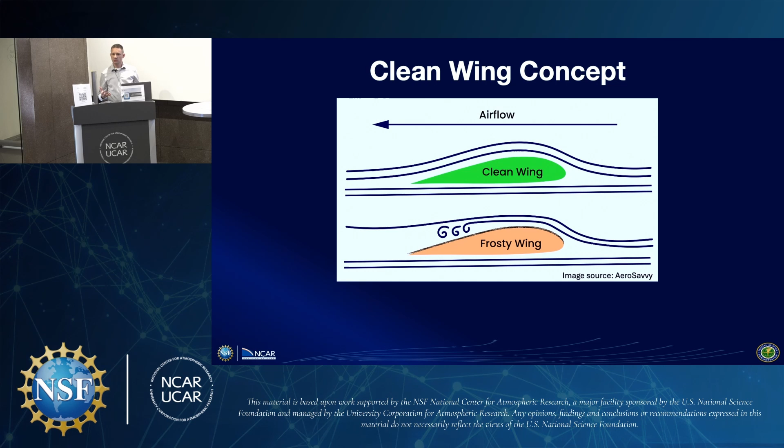So how much contamination on the wing is potentially too much that would cause a problem? Literally as little as 1/4 of an inch of buildup on the wing is enough to affect lift on your aircraft. That'll increase drag, increase weight, decrease your lift, and if you're trying to take off from the ground, it can definitely cause you problems.

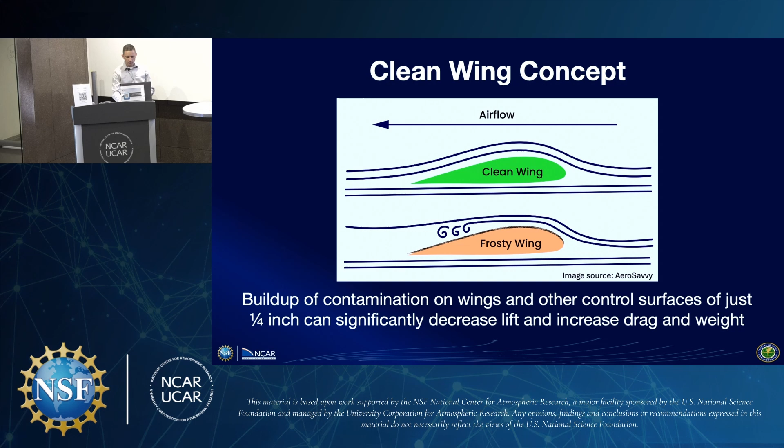So let's talk about some of the incidents that have occurred in the past that highlighted the dangers associated with snow buildup on the aircraft on the ground. The first one I want to talk about is Air Ontario Flight 1363.

This accident happened back in 1989. This was an aircraft that was flying from Thunder Bay to Winnipeg, and it stopped in Dryden to do a quick fuel up. The problem was when they landed, the auxiliary power unit on the aircraft stopped working. And that meant if they turned the engines off, they would not be able to get the engines restarted. That airport is also a very small airport, so they didn't have power that they could hook up to the aircraft to allow the aircraft to start the engines again.

So while they're stopped there, they're fueling up. It was lightly snowing at the time. The pilot said, well, I can't turn the engines off, and regulations state that you cannot de-ice an aircraft while the engines are running. So we simply won't de-ice the aircraft.

So before takeoff, it was noted that roughly 1/4 to 1/2 an inch of snow had built up on the wing surface. And as they were getting ready to take off, they became airborne briefly, but because of that added friction on the surface of the tops of the wings, they couldn't gain altitude because they didn't have enough lift. They ended up clipping the tops of the trees at the end of the runway, and the aircraft crashed, killing 24 of the 69 people on board.

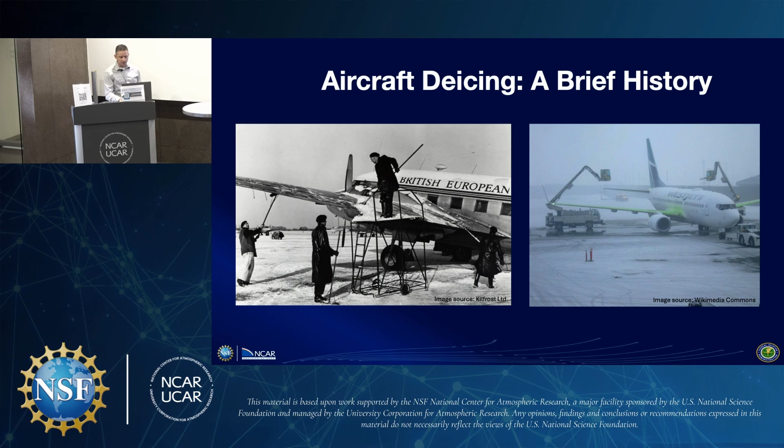So I'm going to give you a little more detail on the de-icing fluids themselves. When an aircraft goes out for de-icing, the fluids used are referred to as type 1 fluids. These are non-thickened fluids, and that's important for the next fluids we talk about. These fluids are typically a water and propylene glycol mixture. For anybody familiar, propylene glycol is the same chemical used in antifreeze in your cars, so it's literally the same components we're using to de-ice the aircraft.

The de-icing fluids are applied hot at high pressure. The idea is not only do we want to melt any of the precipitation and contamination on the aircraft, we want to blast it off the aircraft as well. We want to make sure there is nothing left sticking to the surface of the aircraft.

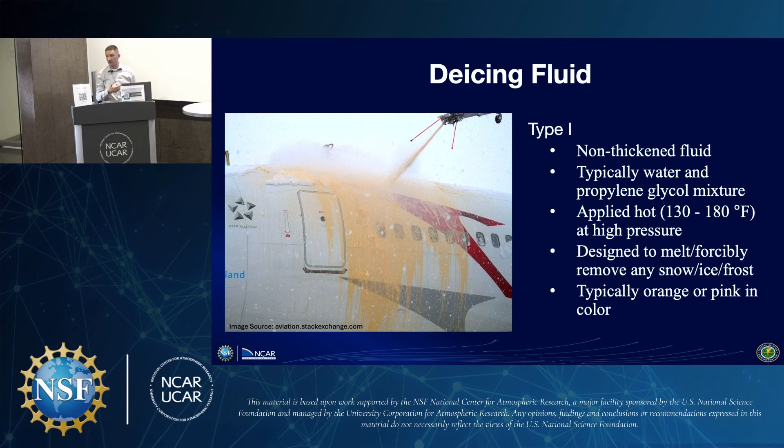These types of fluids are typically orange or pink in color when applied. So anybody who's been through the de-icing process, sitting in a window seat, the first thing you'll probably notice is this orange fluid dripping down over your windows as you go through the de-icing process.

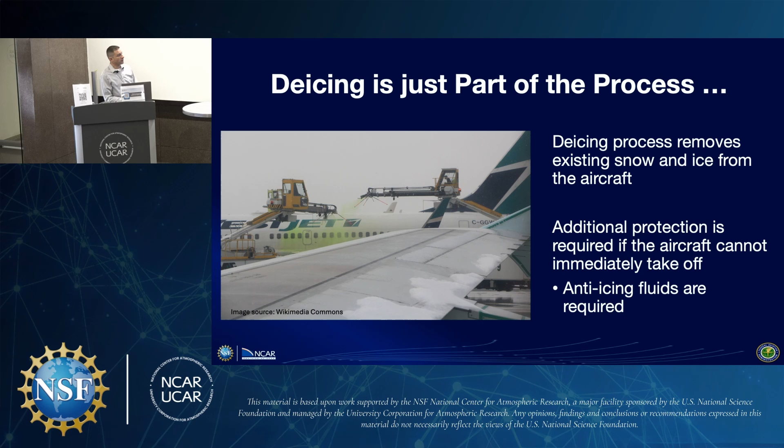However, de-icing is just one part of the process. De-icing will remove the contamination, but if you're in a situation where snow and ice are still building up on the aircraft and it isn't ready to take off, you need to do something to prevent snow and ice from building up. In that case, we have anti-icing fluids that are applied to the aircraft.

Anti-icing fluids are referred to as type 2, 3, and 4 fluids. These are thickened fluids, and I'm going to talk a little more about that coming up. They're applied at ambient air temperature, so we do not heat these. We want them to reside at ambient temperature, basically so the fluid will stick to the aircraft a bit more.

The purpose of this is really to absorb any of the falling precipitation - rain, freezing rain, snow, freezing drizzle. Anything coming out of the sky is going to land in this fluid, and this fluid is going to absorb that precipitation. These fluids are typically yellow or green in color, and are either propylene glycol or ethylene glycol-based fluids.

Type 2 fluids were the initial anti-icing fluids they came up with, after they realized that yes, we can do de-icing, but if an aircraft is going to take off in continued snowfall conditions, we need to provide protection. Type 2 was what they came out with, and that color is mostly straw in color.

The type 3 fluids are designed specifically for commuter type aircraft. These are aircraft that are going to take off at lower speeds, and I'll talk a little bit coming up about why that's important.

The Type 4s were introduced in the early to mid 90s. They're emerald green in coloring. All of these Type 2, Type 3, and Type 4 fluids can provide protection up to 2 hours, depending on the conditions the aircraft is experiencing. The nice thing about Type 4 fluids is if you run out of Type 1 fluid, you can simply dilute a Type 4 and heat it up to use as a de-icing fluid also.

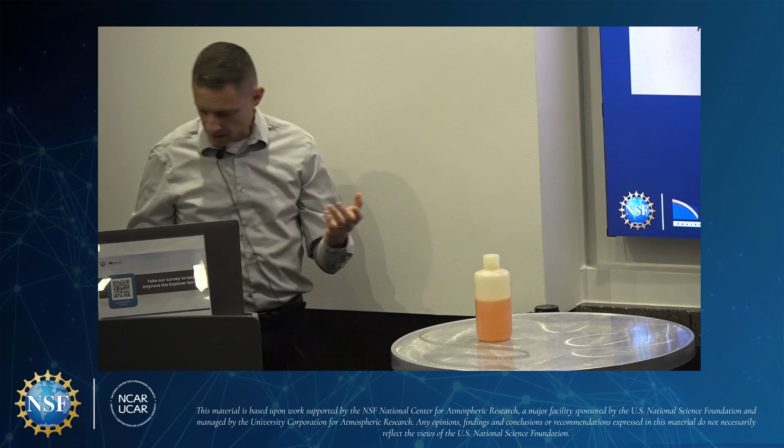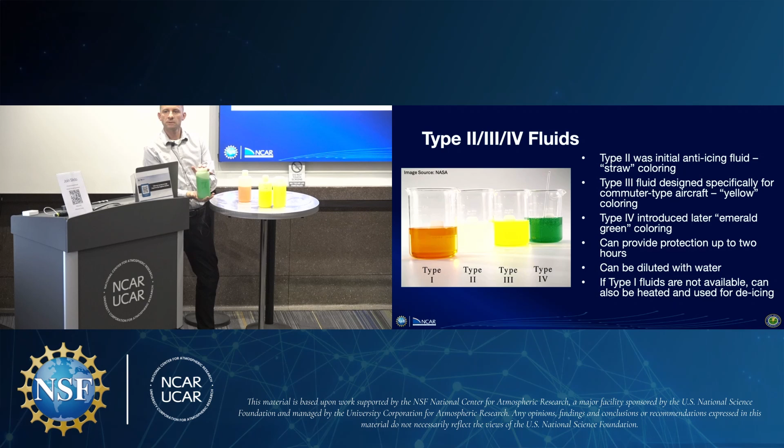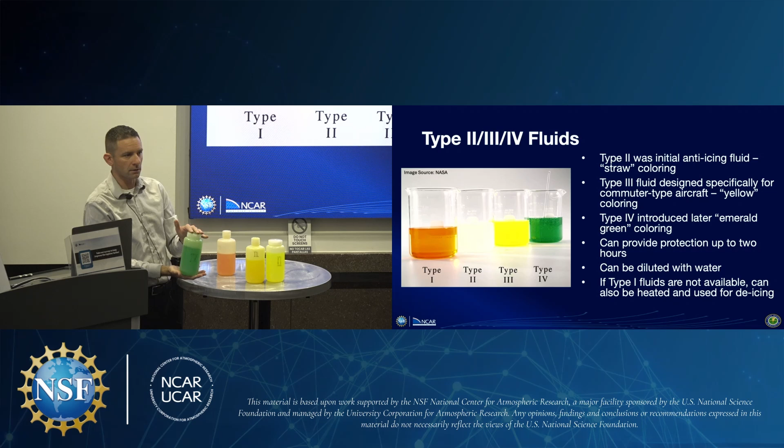Our other types of fluids - we have a Type 2 fluid, which is straw-like in color, a little bit yellow. Here's our Type 3 fluid, which is more for commuter type aircraft. And then we have our Type 4 fluids as well. The difference you notice with the Type 4 fluid is it's much more thick. These fluids are really designed to adhere to the aircraft surface and provide protection so that as it's precipitating, it's not running off really quickly - it's sitting there, absorbing that precipitation. Incidentally, we also call this our Slimer fluid because of the green coloring.

Why might the fluids be different colors? This is for all of you in person as well as those of you online. I'll turn it over to our AV people and let them bring up the Slido questions so you can answer that.

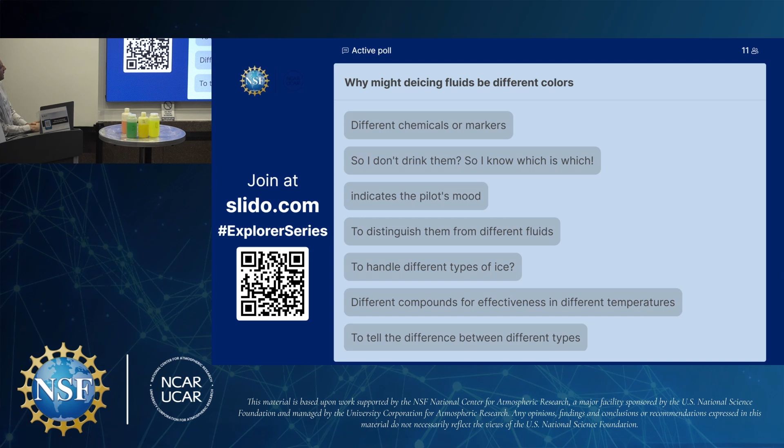Here's our answers: different chemicals or markers. So I don't drink them, so I know which is which - fair, I will say you do not want to drink these fluids. Indicates the pilot's mood - also fair. To distinguish them from different fluids, yes, and we're going to come back and touch on that. To handle different types of ice - also a good one. Different compounds for effectiveness in different temperatures, or to tell the difference between different types. Congratulations, you have all hit on the correct answers.

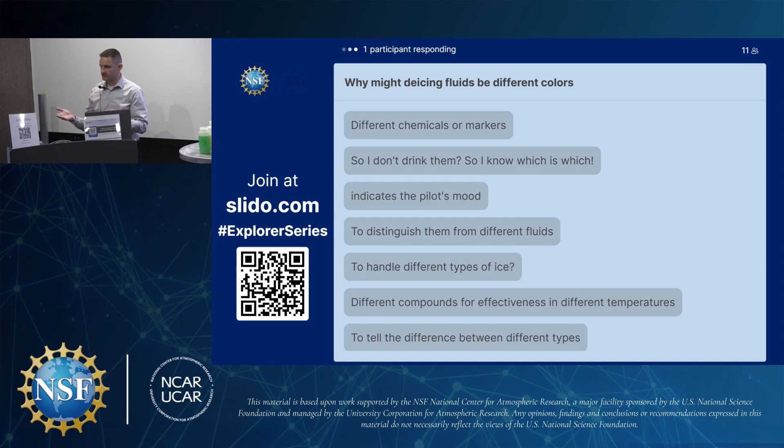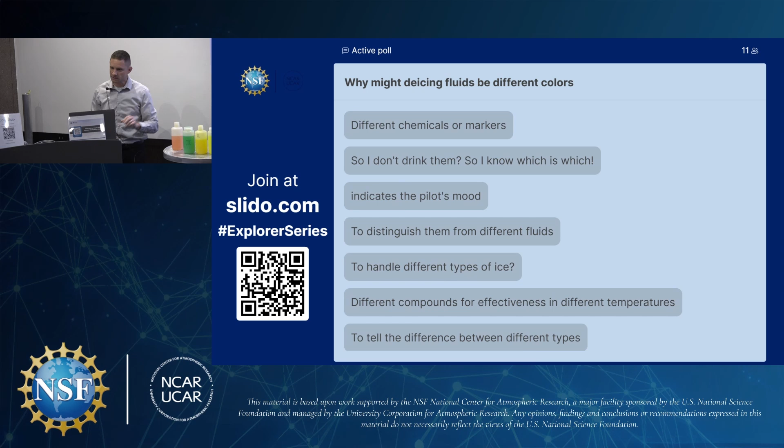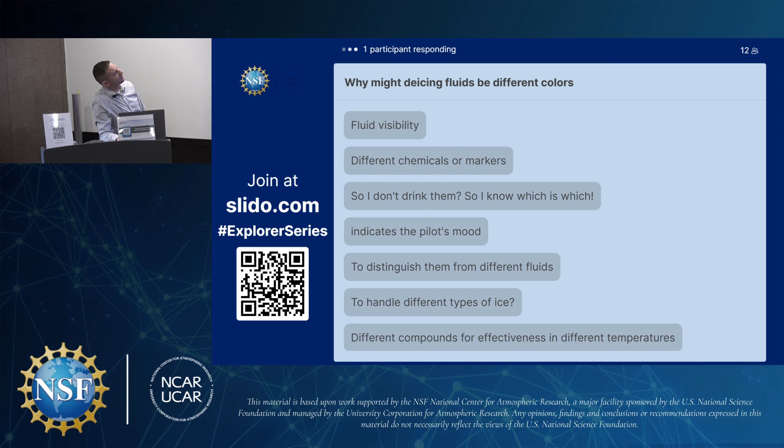The coloring is really twofold. One, it's so the de-icing people, when applying these fluids, can tell which sections of the aircraft they have done versus the sections they haven't. The initial fluids were not colored, so when you applied it, especially if it's precipitating, it's really hard to tell where the fluids were on the aircraft. So then we colored them different colors so you can tell Type 1, the very distinct pink-orange color, versus the Type 2, 3, or 4 fluids when applied to the aircraft. Well done, congratulations - you're all on my same wavelength. Fluid visibility, perfect. All right, let's switch back over.

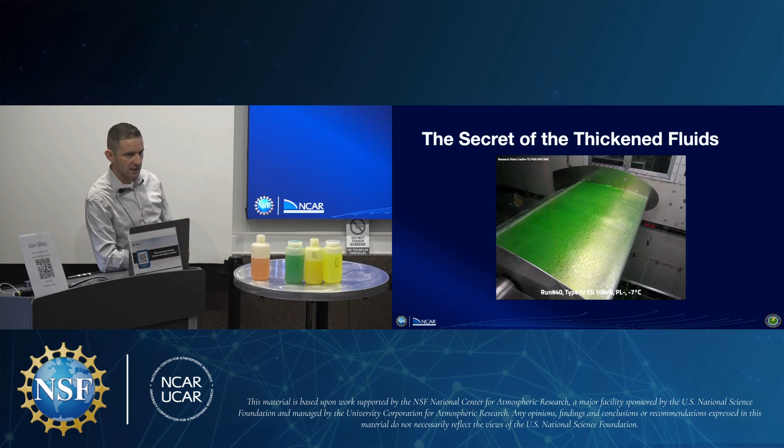Now I want to talk a little bit more about these thickened fluids. I said at the beginning of the lecture that there's this clean wing concept - when you go to take off, you don't want anything on the wing. However, this Type 4 fluid, when you apply it, sticks to the wing. That's bad, right? The Type 4 fluids actually had a little bit of engineering that went into them. These fluids have a special polymer that chemists designed that makes the fluid thick. So the idea is you put these polymers in the fluid, put it on the aircraft wing, and it's thick, viscous, and sticky. But we refer to these fluids as a pseudoplastic fluid, meaning that when a shearing force is applied, those polymers break down, and this Type 4 fluid will actually turn to the same consistency as a Type 1 fluid.

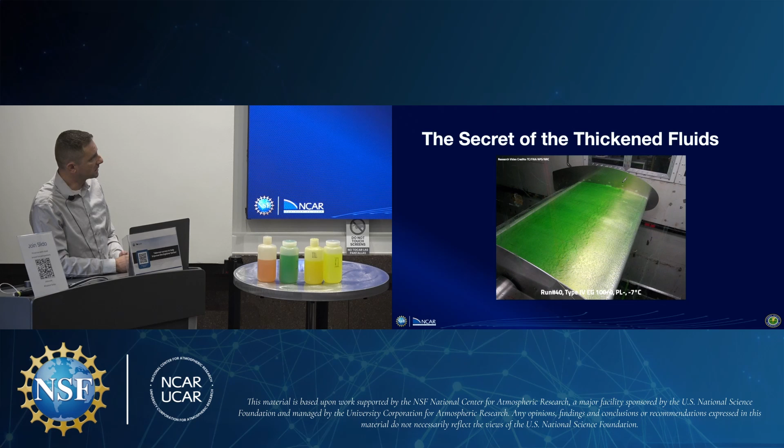I have up here a demonstration. One of the testing mechanisms we use is taking an artificial wing surface, which is what you see in the picture here, and this is actually a video. I'll start this video running in a second. This is in a wind tunnel. We have Type 4 fluid - you notice the emerald green coloring - and there has been precipitation applied to this. They've applied ice pellets in the wind tunnel to this fluid. I'm going to start this video running here.

There we go, you notice the flashing. That's a series of cameras set up to take pictures at certain times. What's going to happen is they're going to turn the wind tunnel on.

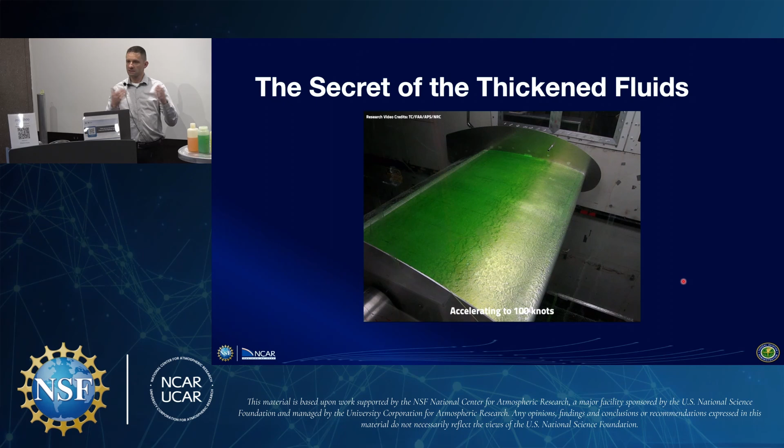We have a fluid that has absorbed a bunch of precipitation. It's clearly stuck to the surface, but now we're going to simulate an aircraft accelerating up to 100 knots. As the wind gets stronger, the fluid becomes thinner and thinner and actually runs off of the wing. So imagine at this point the aircraft is going down the runway, it's reached the speed at which it's getting ready to take off. The fluid has now completely run off the wing along with all of the contamination. Now the wing tilts up to simulate the aircraft actually taking off from the ground.

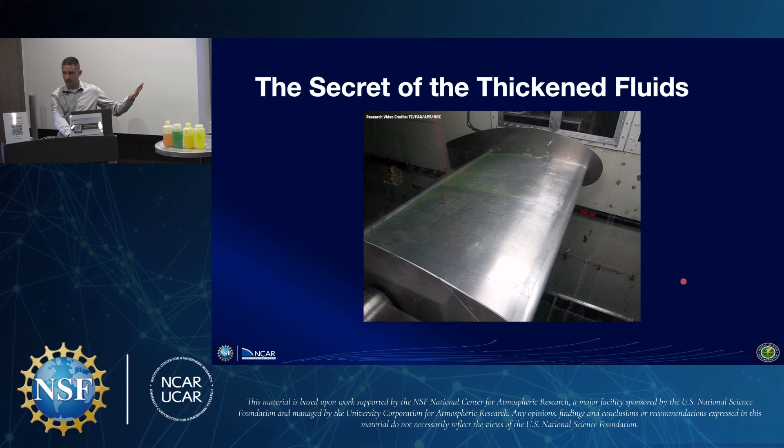So now we have a fluid that provides protection to the aircraft. It's going to stick to the aircraft when you need it to stick, and it's going to run off the aircraft when you don't want it sticking anymore. A lot of engineering has gone into these particular fluids.

As far as the anti-icing process itself, how long those fluids last is really determined by the type of precipitation that's falling. Is it snow? Is it ice pellets? Is it a combination of mixed precipitation? The rate the precipitation is falling, and the airport layout also has an impact on this.

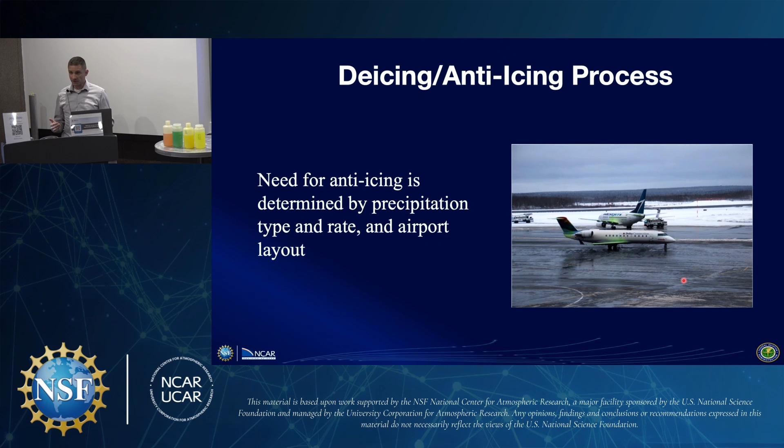There are two different ways aircraft can be de-iced at an airport. There's gate de-icing - this used to occur at Chicago O'Hare all the time. The aircraft would pull up to the gate, people would get off, new people would get on, they'd load all the luggage, and then before they pushed back from the gate, the de-icing trucks would come up and de-ice the aircraft. The problem with gate de-icing is as soon as you apply the fluids, you have a certain amount of time you have to get airborne before you have to apply those fluids again.

When you do it at the gate, you've got to wait for somebody to push the aircraft back, then start taxiing, then get in line. So you're cutting into the time that these fluids are going to last. Also, you're creating hazardous conditions on the ground because de-icing fluid is extremely slippery. There are a lot of slip and fall accidents that occur with the ground crews loading and unloading baggage on the planes as well.

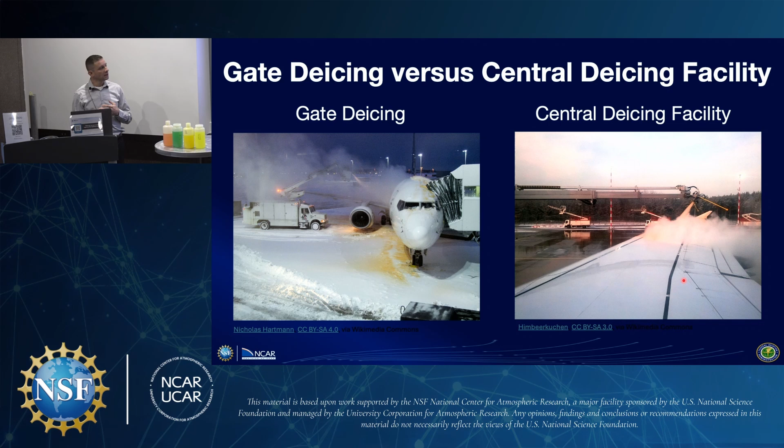Central de-icing facilities, on the other hand, are a big area at the airport, and DIA actually was one of the airports that kind of spearheaded this when they built it back in the 90s. It's a big pad located right next to the runway. The idea is the aircraft will go out to this pad, all the de-icing trucks are there, you pull up, the trucks come up and very quickly de-ice you. If they need to, they will anti-ice you. You're given clearance at that point that you're good to go.

Usually you're first or second in line, so you pretty much go, get on the runway, and take off - you're out of there in 10 to 15 minutes after the de-icing process. So the central de-icing facilities are really the way airports are trying to move to cut down on a lot of the time needed for aircraft taxiing while you've got these fluids on the wings.

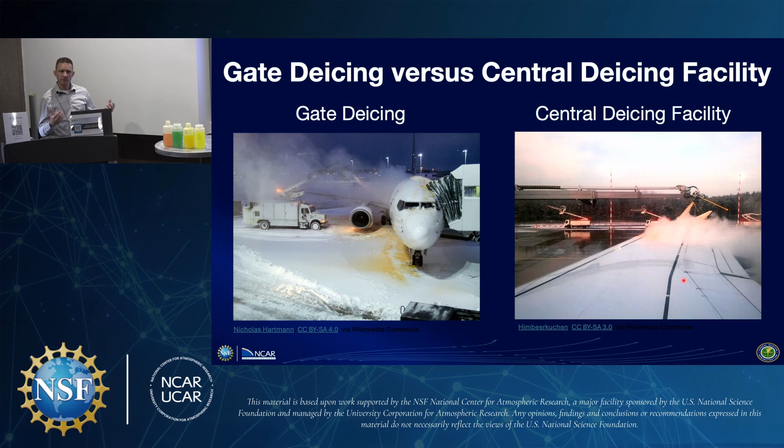I get a lot of questions once I've talked about these different fluids. The most common one is, how long does the fluid last? Meaning, how long does it provide protection to the aircraft? There are a lot of factors that go into that.

The outdoor temperature, for example, with the type 4 fluids - I talked about how we have these polymers in this fluid. These fluids are also known as non-Newtonian fluids because not only do they become less viscous with the shearing force, but also as the temperature gets colder, the fluid gets thinner instead of thicker. The reason is that the polymers used here, in colder temperatures, actually start shrinking down, and that naturally causes a thinning of the fluid itself. So the thinner the fluid, the more it's going to run off the wing, the shorter the amount of time it's going to provide protection to the aircraft.

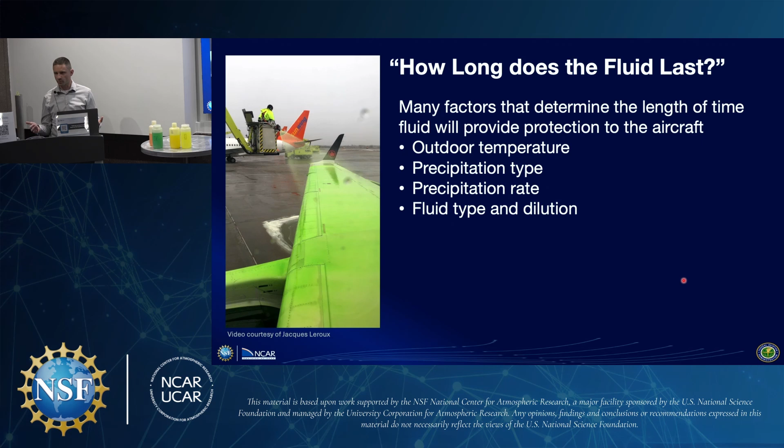Precipitation type and precipitation rate are factors, as well as the fluid type, meaning is it type 2, type 3, or type 4, but also the manufacturer of the fluid and the dilution of that fluid. A lot of these fluids can be applied at 100% concentration, or you can thin them down with water, which allows you to use less fluid, especially in light precipitation when you know the aircraft will get off the ground quickly. It's a bit of a cost-saving measure for the airlines.

Another question I get is, how do pilots know when the fluid may no longer be providing protection? Pilots use holdover timetables. Holdover meaning the amount of time you have from when the fluid was first applied to the aircraft until that fluid is likely no longer providing protection from precipitation to your aircraft.

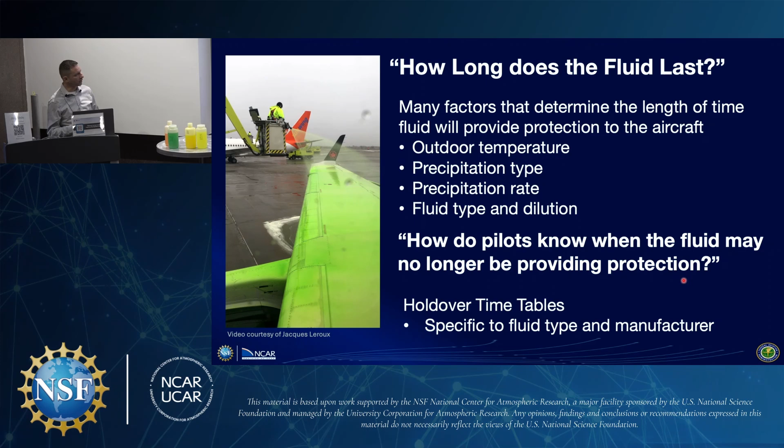These holdover times are specific to the fluid type and the manufacturer, meaning every time a manufacturer comes out with a new fluid, they have to go through an entire certification process with the FAA and Transport Canada before that fluid can be used on an aircraft. One of the things that comes out of that is these holdover tables.

The first thing they need to know is outside air temperature. They're given information in the cockpit as to what the current weather observations are at their airport. They'll look at this chart and say, okay, the first thing I need to know is ambient outdoor air temperature.

They need to know the fluid concentration, the fluid water by percent volume. That will be given to them by the ground crew telling them what type of fluid is being applied to the aircraft. And then they have to know what the precipitation type is.

This table will give them times for freezing fog or ice crystals, snow, freezing drizzle, light rain, and rain on a cold-soaked wing. Cold-soaked wing being an aircraft that has just landed—it was up flying at altitude where it's minus 60, then comes into an airport where maybe the temperature is slightly above freezing and it's raining, but the wing temperature is below freezing, meaning rain hitting the wing will freeze on the wing. So they have a category for that as well.

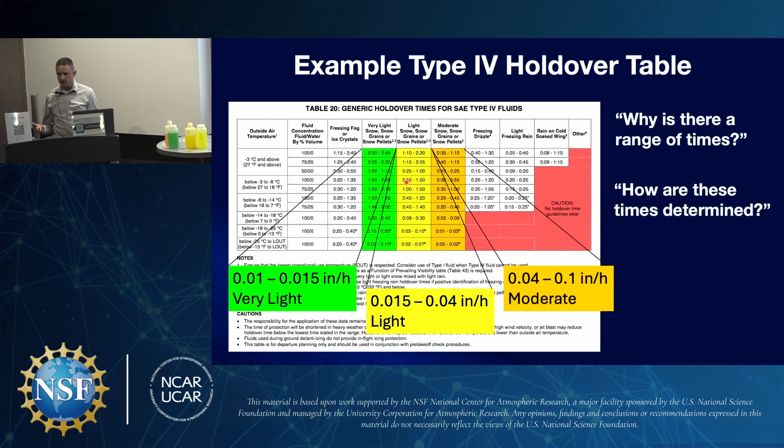It's a series of plates, and those plates are angled at 10 degrees. That 10 degree angle is done intentionally to simulate the angle of an aircraft wing, the top of the aircraft wing. So you apply the fluid to the top of the wing. We want to make sure that as the fluid is slowly moving down the wing due to gravity, we're simulating that same thing with these tests.

So we have a bunch of different plates set up, and we pour the fluids on the plates. We also have what are called rate pans, not shown here, similar in size to these plates. They also coat them with fluid, and leave them sit out there for 10 minutes while it snows on those pans. They weigh them before they take them out, then bring them inside and weigh them again. Subtract the difference, and they know how much snow, liquid equivalent, fell into that pan.

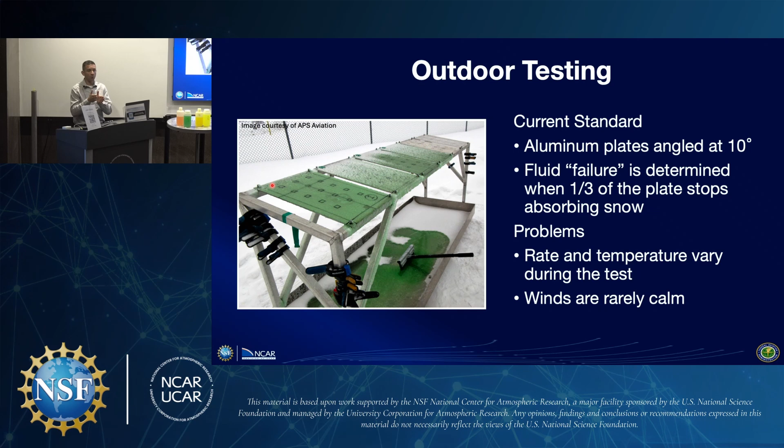Now, there are problems with doing this. Conditions outdoors are rarely ever constant. So you set these plates up, you let it precipitate, a snow band may move through. Maybe initially you've got really heavy snow, and then throughout the testing it may taper off to lighter snow. Also, the temperature throughout the testing may change as well, maybe warming up, maybe cooling down. So that becomes a problem of how do you start addressing those variables when we know they impact how long these fluids are going to last.

There's also the problem with winds. Winds are rarely calm, and winds can further impact some of the fluids. I'm going to talk about how that is in some of the data we've analyzed on the NCAR side, to show that wind actually does play sometimes a very significant role in how these fluids react.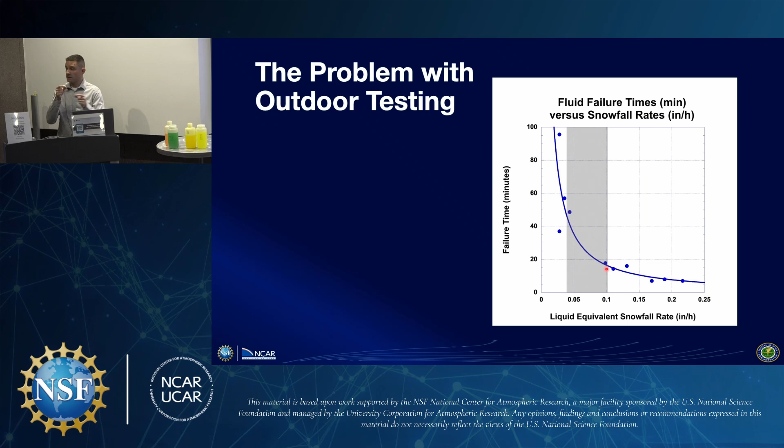Until you look really closely at this plot. Notice the two points that I have arrows pointing to. These points have roughly the same liquid water equivalent snowfall rate. However, their failure times are very different. The one on the bottom had a failure time of about 35 minutes, but the one on the top had a failure time of 90 minutes. There's almost an hour difference in these two particular tests, and yet the average liquid water equivalent snowfall rate was the same for the two of them.

This is where the FAA and Transport Canada and everybody is saying, why is this? Why do we see these conditions? A lot of it goes back to the outdoor testing, where you have variations in the snowfall rate throughout the test. Maybe the average rate was 0.03 inches per hour, but maybe it was really heavy at the beginning for one of the tests, and maybe it was really heavy toward the end for the other. Because of that, you end up with very different failure times of your fluids.

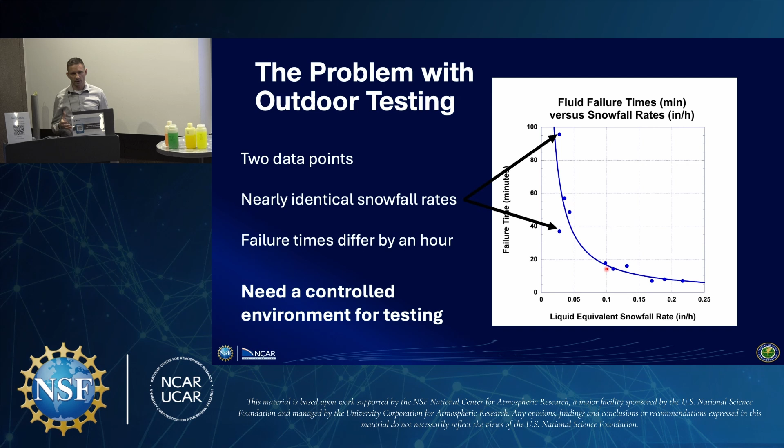So that means we need a controlled environment to do this testing in. This was recognized back in the 1990s, where the FAA, Transport Canada, and APS Aviation said outdoor testing is okay, but we really need a laboratory-controlled environment to do this testing. That means we need to find a way to bring the snow indoors. We have to develop a method where we can have it snow indoors and control these variables that we think impact fluid failure time. So we need to be able to control the temperature, and we need to be able to control the snowfall rate.

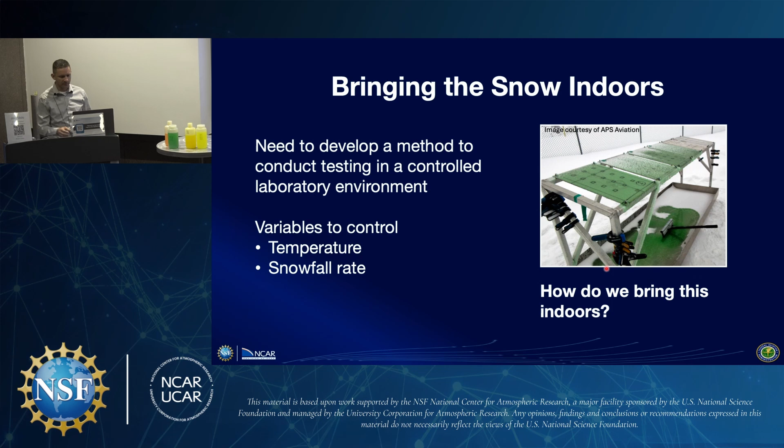So that brings the question, okay, how do we bring this indoors? Which brings me to my next Slido question for audience participation. How would you make it snow in a laboratory? I'm very impressed with all of your answers so far, so let's see if you can nail this one also.

Snow machine, build a snow machine. Clearly there are some of my colleagues calling in online who are cheating and answering this question. Pray and ask God to make it happen. Probably not gonna work so well, but we have not tried that. Shave off pieces from a block of ice and let them fall. Again, that would be one of my cheating colleagues online. Use the same stuff as they use at the ski resorts. What a novel idea.

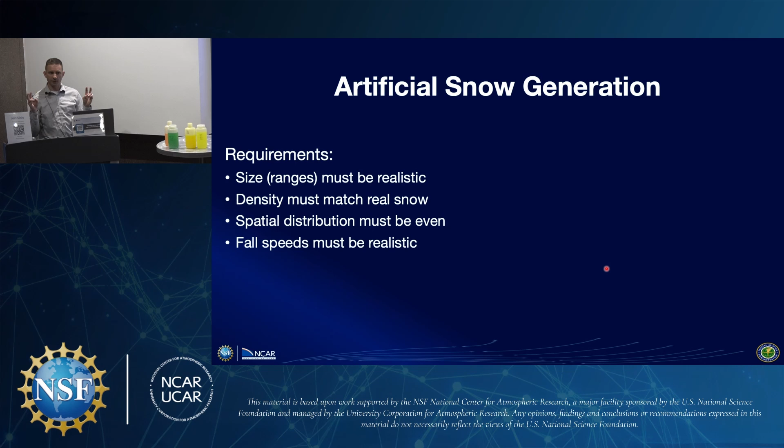So the first thought was, let's look at what the ski resorts do. Ski resorts take water and spray it into a very cold environment to create their snow. So we gathered some of that ski industry snow and looked at it under a microscope, and this is what it looks like. It does not look like snowflakes. In fact, they are very small frozen water droplets, many of which have actually frozen to each other—more like tiny ice particles. That obviously means the density isn't going to be right, and the snowfall rate isn't going to be right. So this was not really a viable option for us.

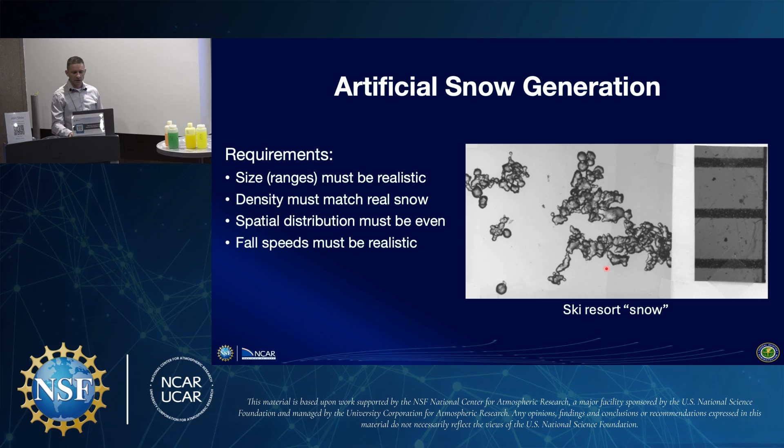But we said, if we can't use water in this manner, we could always think of shaving ice, like a giant shaved ice machine. So we ran with that idea and developed the NSF NCAR FAA shaved ice snow machine. The idea is that we create cylinders of ice loaded into a linear translation system that feeds them into a specially designed rotating carbide bit that shaves the ice off, creating snow-like particles.

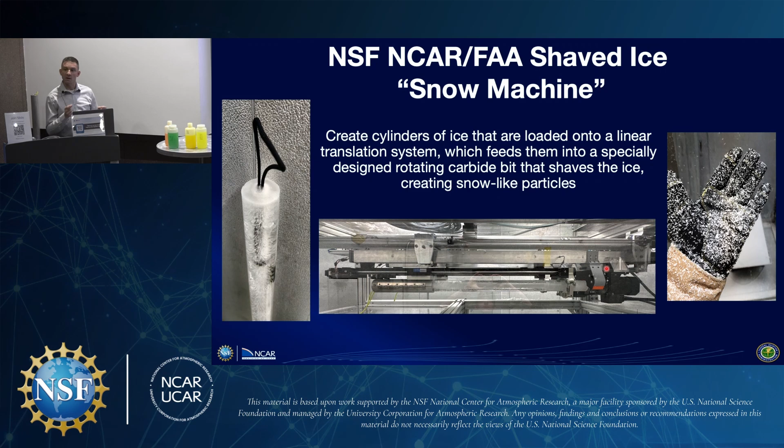Great in concept, actually works fairly well. I will say that this particular process has been something we have been working on for decades now, because while it may seem simple in concept, there are a lot of little nuances in being able to create this. And I'm going to talk about some of those.

So let's start with the ice creation process. How do we actually create the ice cylinders themselves? Initially we thought, perfect, we're going to get a metal cylinder, put some water in it, stick it in a cold room, let it freeze, and then bring it out into the open, into the warm room, and that cylinder is going to warm up, and we're going to be able to pull the ice cores out, and they're going to be perfect.

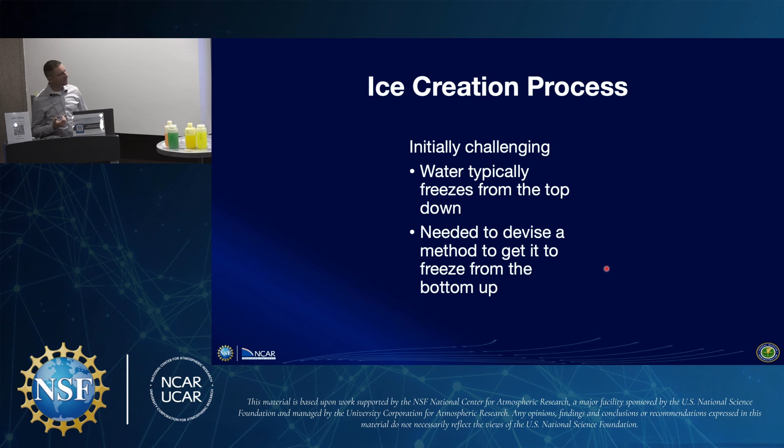The problem was, ice likes to freeze from the top down. So when we put it in there, ice would freeze at the top, which would then increase pressure at the bottom as it was freezing down, and we would break the bottoms off of our molds. So we needed to devise a method to get it to freeze from the bottom up.

Here's an example of our ice molds that we use. We take insulation and put really heavy insulation at the top, then taper it down to no insulation at the bottom. This essentially solved our problem. Now it will actually start freezing closer to the bottom first, and that water pressure gets pushed upwards, so that now you get freezing from the bottom up.

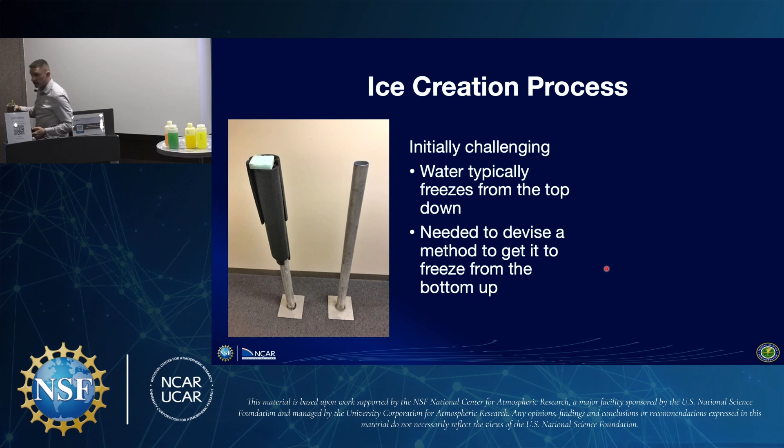To give you an idea of how big they are, this is an example of one of the ice cores that we feed into the machine itself. And this is one of our cores. So you can see nice formation of ice. Once you do that tapering, you do get lots of air and stuff that tends to get trapped in it, but for the most part, you actually have a really nice ice core that then you can take out and load into the machine itself.

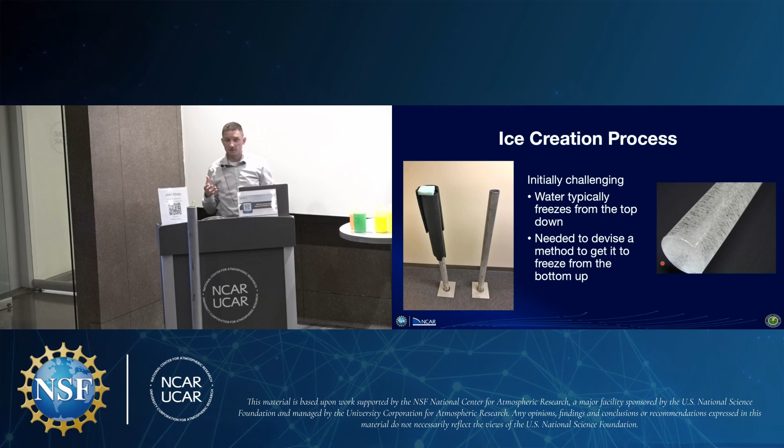Okay, so we solved the ice core problem. We were able to get these nice cylinders of ice that we could then load into the machine. So the ice cylinder is mounted to a linear translator system.

Those of you familiar with a 3D printer, same type of idea. We have this device here, which is our connector. So we load the ice into that. It's attached to a lead screw and a stepper motor back here. So the stepper motor turns, which then moves the ice along and feeds into a Forstner-style bit at the other end of the machine. This is one of our original designs that we had come up with for the machine.

At first, we simply just had the translator and the Forstner bit, and we would turn the machine on, and of course, the ice shavings would go everywhere. All over the top, all over the sides. So you can imagine when you're trying to do testing on some of these plates, when you get it down to the bottom of the machine, eventually you get big clumps that fall off the top of the machine and fall down onto the plate at the bottom.

This was a problem for many, many years. We finally came up with this idea where we have this half-moon crescent shape that is very close to the drill bit itself, and then we attach these whiskers to the drill bit. So as the drill bit is spinning, snow gets flung out and sticks to the bottom of this, but those whiskers then come around and scrape the snow off. So all of the snow now gets directed down to the bottom of the machine.

The problem with this initially was we were using foam and stuff, and if you didn't get it aligned perfectly, you would get chunks of foam that would also come flying off and land down on your test surface below. So we had to go back and do some redesigns of that.

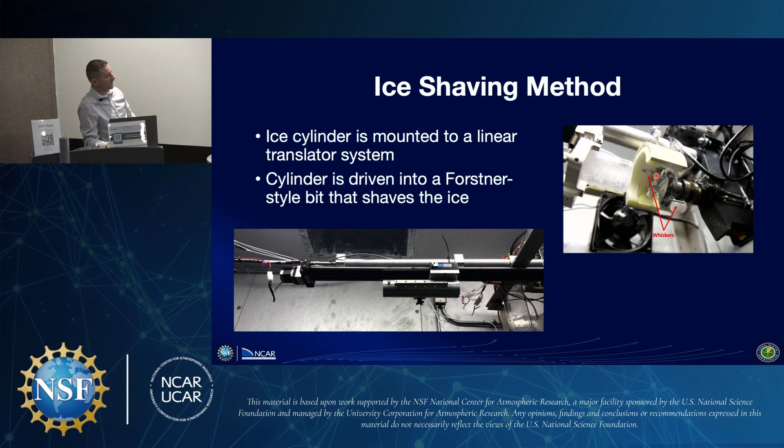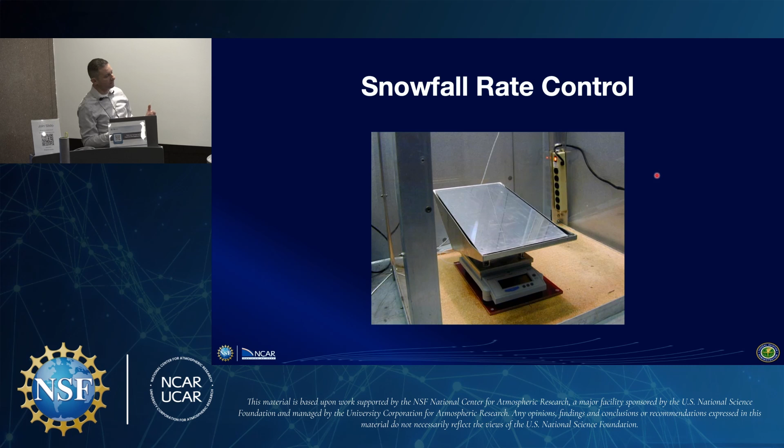Then we also had the problem of how do you control the rate of ice being fed into the drill bit to come up with a consistent rate. So we have our tray assembly at the bottom. We have our 10-degree test surface, just like you saw outdoors. We have a mass balance at the bottom of the machine that's simply weighing the weight of everything on top of it. This is connected up to a computer.

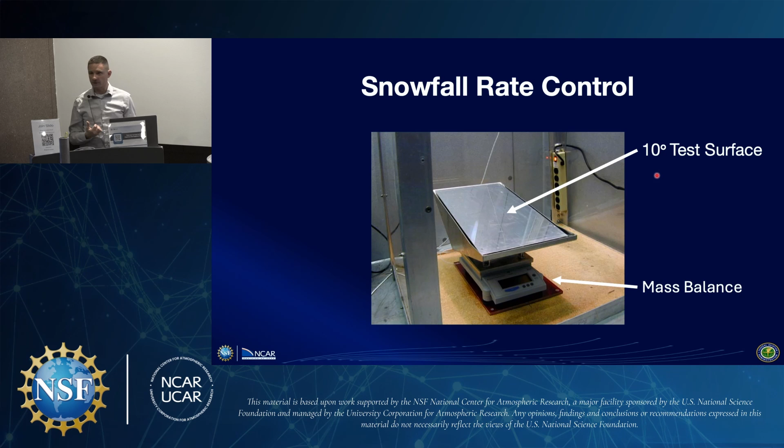So as we run the machine, snow falls down onto the plate. Because we have this nice fluid containment assembly, when we pour the fluid on the plate, any fluid running off the plate gets captured in that assembly, but it's all confined on top of the balance. So we're not losing any weight from fluid coming off the plate. The only thing being added is the snow.

So based on the amount of snow being added, because of the addition of weight, we can derive what that snowfall rate is. And based on that, the computer can control how quickly it's pushing the ice core into the drill bit.

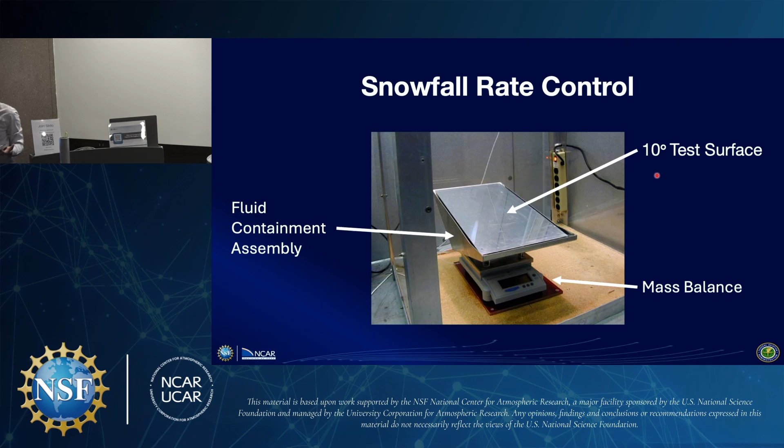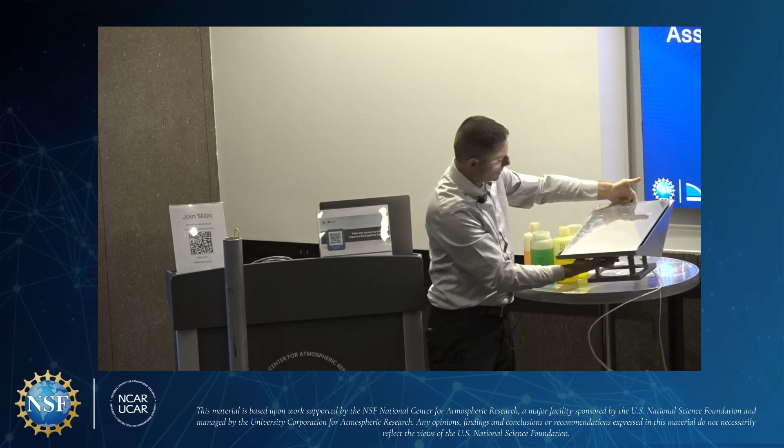So here is one of our test surfaces. This gives you an idea of the size of the test surfaces as well as the fluid containment unit. In any given test, we simply pour the fluid over the top of the plate, let it run down the plate, and this would then sit on the mass balance and simply collect the snow as it falls down from the top of the machine.

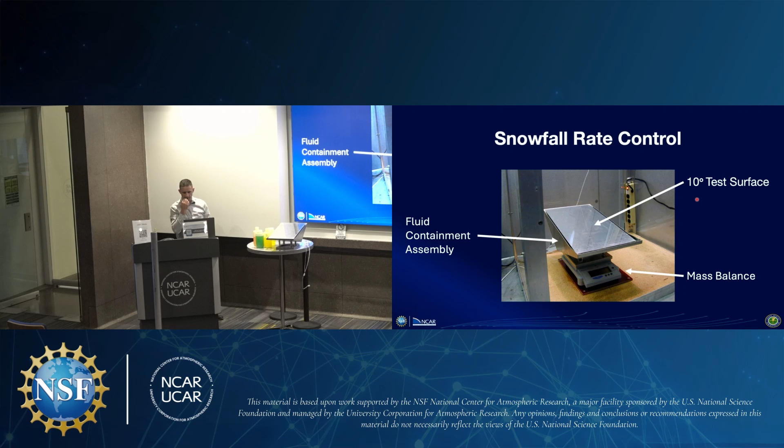So we said, okay, great, we've solved the snowfall rate problem. We know how to do that. Now we've got to design the computer interface. This became a little bit more challenging, but we were able to do it.

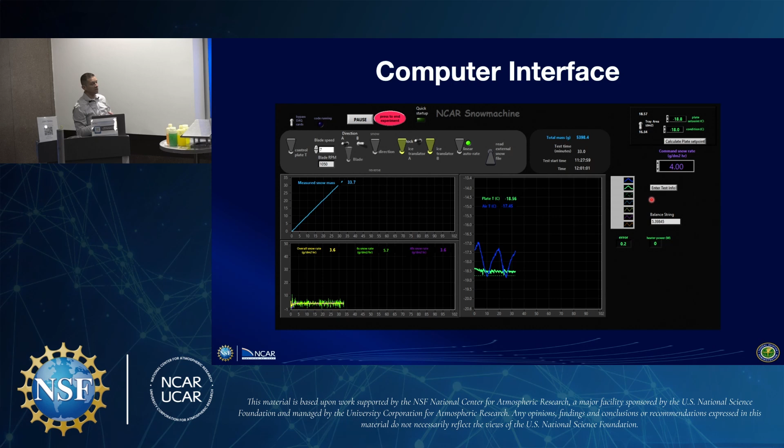So we have full control of everything that happens in the machine. We can turn the blades on. We can simply put in the rate that we want the snow, and the computer will control that rate. And then we can record all of the information coming out of the machine, so we can monitor the air temperature, and we can see the snow mass.

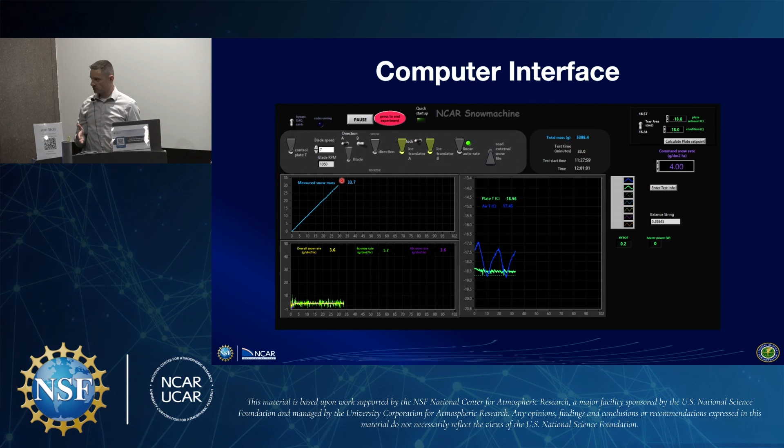This nice straight line shows that we have a constant amount of snow mass being applied to the plate, so we've been able to successfully achieve a constant snowfall rate. That's the mass, and we can actually monitor the rates in real time at the bottom of the screen.

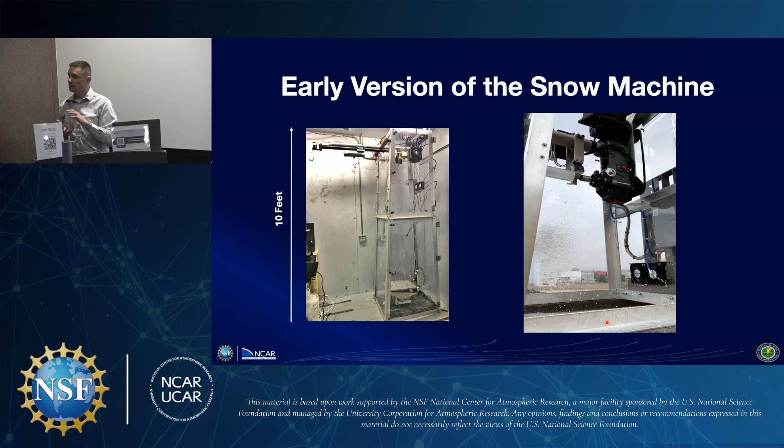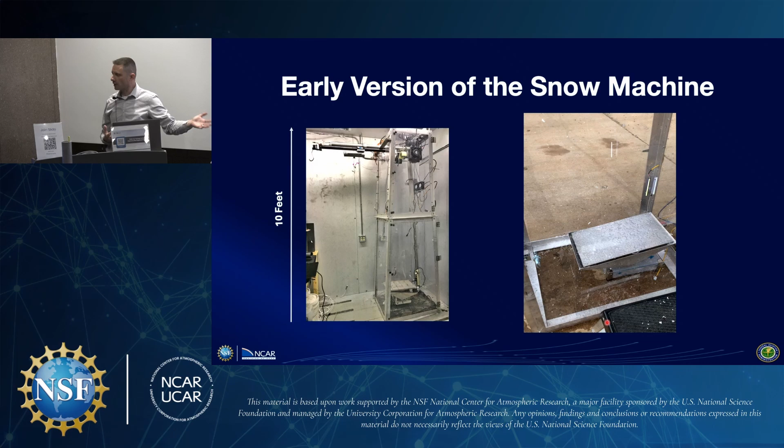So put it all together, and here is what the early version of the snow machine looked like. I'm going to play a little video for you. Initially, we were using a drill press mounted on its side with a bit attached to it to do the actual ice shaving. You can see from this video that you are getting what looks like snow-like particles being shaved off of these ice cores and falling down onto our test surface at the bottom.

The problem we were having was that spatial distribution problem. Because we had one point where we were generating snow, we'd get a lot of snow right over the middle of the plate, and it would kind of taper off as you got out toward the edges. So we would see this streak of snow falling down the middle of the plate, and you'd get less out here, which is not realistic for outdoor conditions.

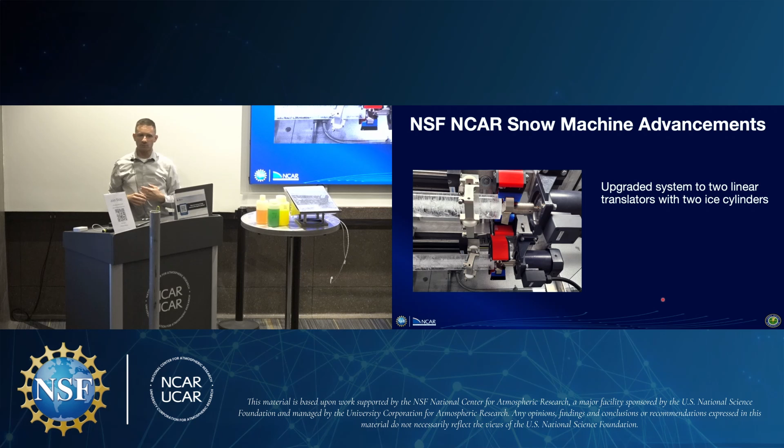So we said, let's do an upgrade. Let's put two ice cores in. And instead of using a drill press, let's swap those out with variable speed motors.

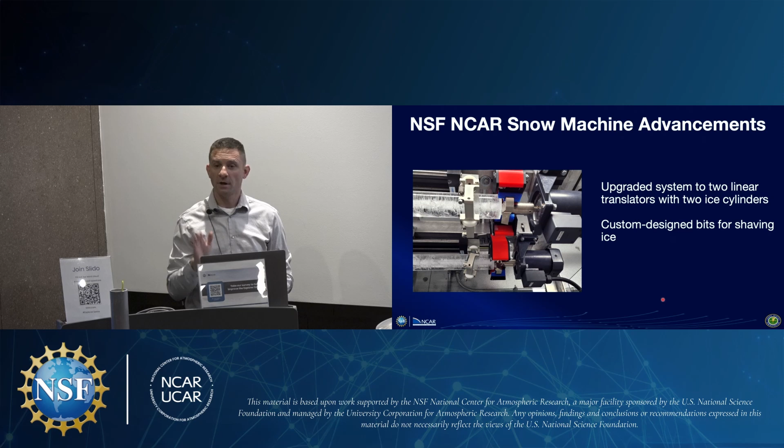We did this, and we had some custom-designed bits for shaving the ice as well. We were having a lot of problems with the bits getting dull very quickly, also chipping away at the ice, which wasn't giving us consistent shavings that mimic snow. So we had to custom design our drill bits, and we found that the angle of the bit, even by a tenth of a degree, made a huge difference in the type of snow you'd get out of these ice cores.

We replaced the drill press with variable speed motors. The advantage was that by controlling the spin rate of the bit, we could actually control the size of the snow particles we were generating. Slower spin rates mean the ice core isn't being shaved as quickly, so you get bigger flakes. Spin it faster, and you get smaller snowflakes. So now we can actually control the size of the snowflakes and test these fluids based on particle sizes.

This has given us an advantage, so we can really look into some of our outdoor environments at warmer temperatures where you may see these big aggregate snowflakes falling sometimes, or smaller snowflakes. We can go in and simulate both conditions. We could not do that very easily before.

Going back and looking at our requirements: size ranges must be realistic, density has to match real snow, spatial distribution must be even, and fall speeds must be realistic. Up to this point, we achieved 3 of those 4 things, but we were still struggling with the spatial distribution. So we said, all right, we're gonna make one more modification to the machine.

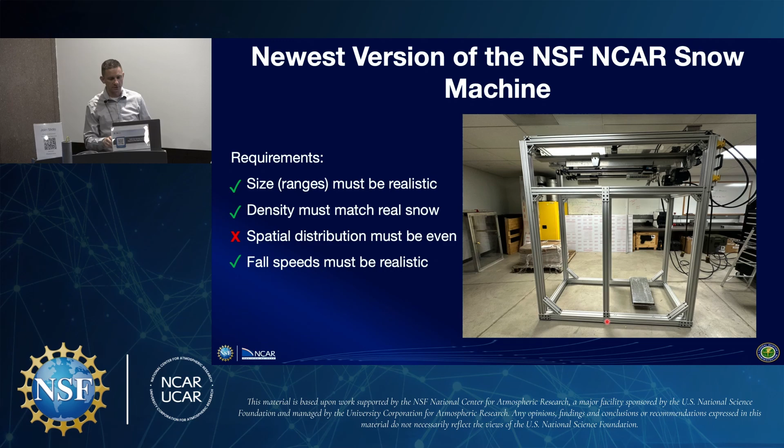We went back to the drawing board and completely redesigned the system using the same concept. We're still using 2 different generation points for the ice aloft, but now we've added an additional component. I'll start this going.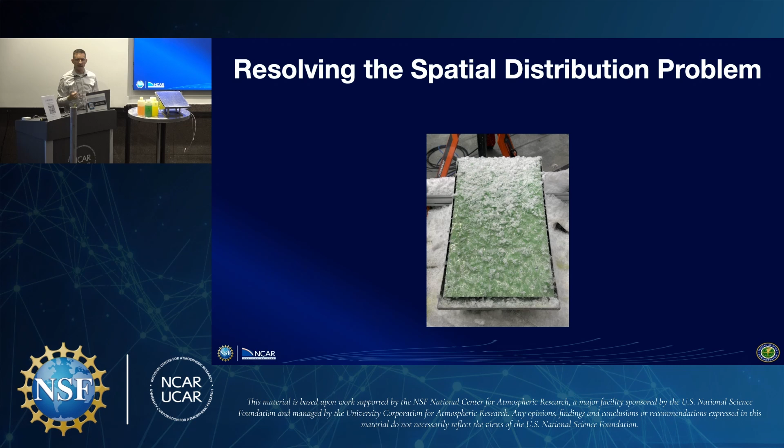So now when we do our testing, instead of getting that line of snow down the middle, we get this nice failure that goes from the top of the plate down toward the bottom, just like we see in natural outdoor conditions. We finally checked that last box. This latest version of the machine actually just came into being last year, so we're literally on the forefront of finally solving this longstanding problem.

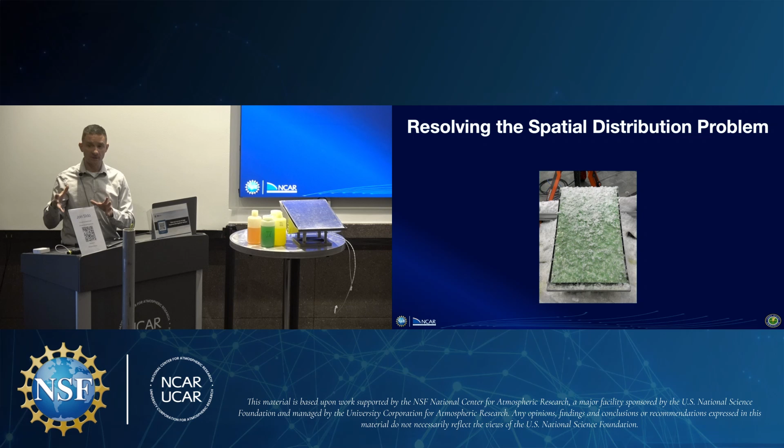I'm gonna talk a little bit about what that means for where we move in the future.

Now I also want to show you, since I've talked a lot about the fluids, what it looks like when we apply fluid to the plate, in terms of the fluid being absorbed, or the snow being absorbed into the fluid. Here's an example from the machine itself, where you can see snowflakes coming off, falling into the fluid, and dissolving into it, with the fluid absorbing them and holding on to them, so it isn't adhering to the surface of the test plate itself. That's what we want to see.

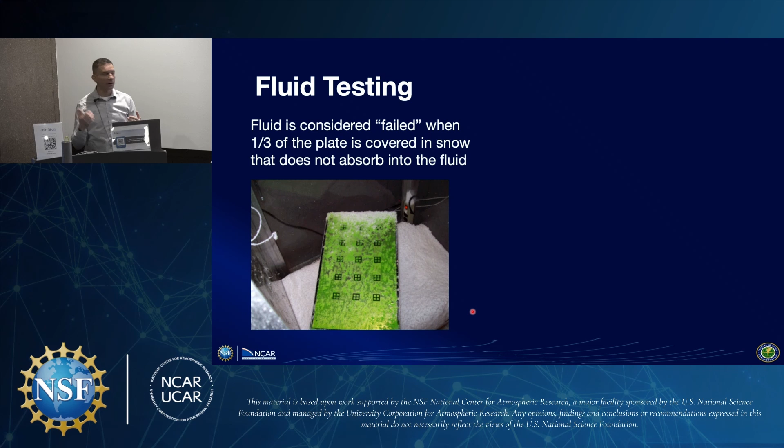So what have we learned on the NCAR side of things? As I mentioned, the fluid is considered failed when 1/3 of the plate is covered in snow. One thing we looked at when we first started testing was what's happening with the temperature of the plate itself during these tests, because the temperature of the plate or the wing is also going to be important.

We embedded a temperature probe in the back, and then we ran a simulation, having it snow in the fluid. In the figure you see here, the blue line is the ambient temperature, which was held pretty close to around -9 degrees Celsius. The green line is the accumulated snow mass, and you want to see a mostly straight line, meaning a fairly constant snowfall rate. The red line is the temperature of the plate.

The thing that immediately stood out: here's your ambient temperature, but here's the plate temperature. As the experiment ran along, the plate temperature got colder and colder until it bottomed out at a certain point, and then that temperature started to warm up. Right after that, this line is where the visual fluid failure was called, where a third of the plate had failed. So we said, aha, this is what's going on with these fluids.

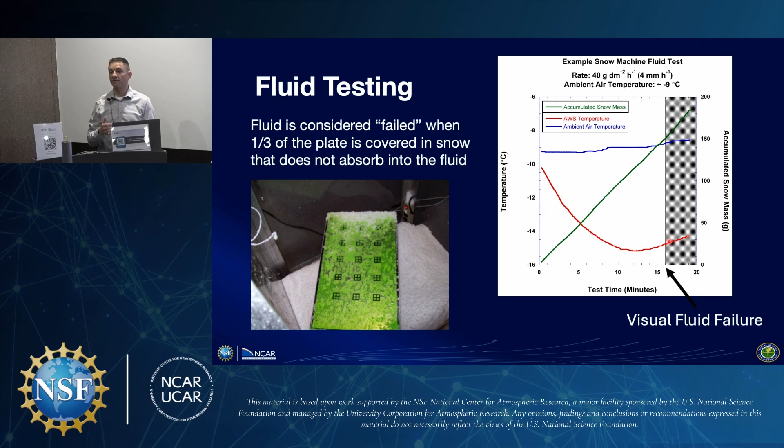In order for that snow to dissolve into the fluid, it's got to pull heat from somewhere, and it's pulling the heat from the wing or the test surface. So as it pulls the heat out, it cools the surface of the wing or test surface. Knowing this, we should be able to model this behavior, because if we can, then we can have an idea going forward of how long these fluids are going to last under given conditions.

So how do we come up with that? This is the only equation I put in here.

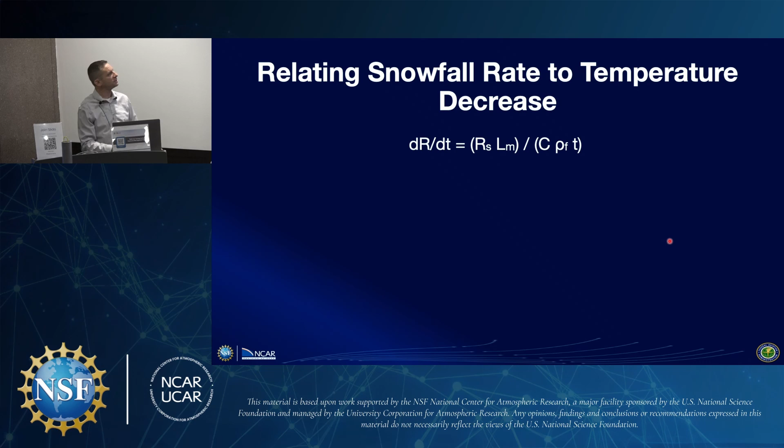I promise it's not that hard to understand. I will walk you through it. dR/dt is equal to R sub s, L sub m, divided by C, rho sub f, t.

R sub s is the snowfall rate. So we're simply relating the snowfall rate to that temperature decrease. Our snowfall rate we know is constant, it's not going to change. We have the latent heat of melting, which you can think of as the heat needed to change the snow from a solid to a liquid, or to dissolve the snow into the fluid itself.

So the snowfall rate and the latent heat of melting are constants, those aren't going to change. The things that are going to change are the heat capacity, which is the ratio of the heat absorbed to the resulting temperature change we see in the fluid or the plate, the fluid density, and the fluid thickness.

So if we can model those things, we should be able to model how these fluids are going to fail. If we go back to the example I showed you with that plate temperature drop-off, you can see at the beginning of the test our theoretical cooling matches exactly what the temperature of the plate is doing. Then as the test gets further along, because we aren't accounting for change in fluid density, thickness, or heat capacity, our line just remains a straight line going down, while instead the line from the plate temperature dips down and comes back up.

So is this something we can use in the future to help better understand when these fluids are going to fail? Yes, we can certainly use that to give us an idea. Is it something we can actually use in practice? Probably not. People aren't going to be comfortable relying just on this model to determine when the fluids are going to fail. We're still going to have to do that testing in a snow machine or an outdoor testing environment.

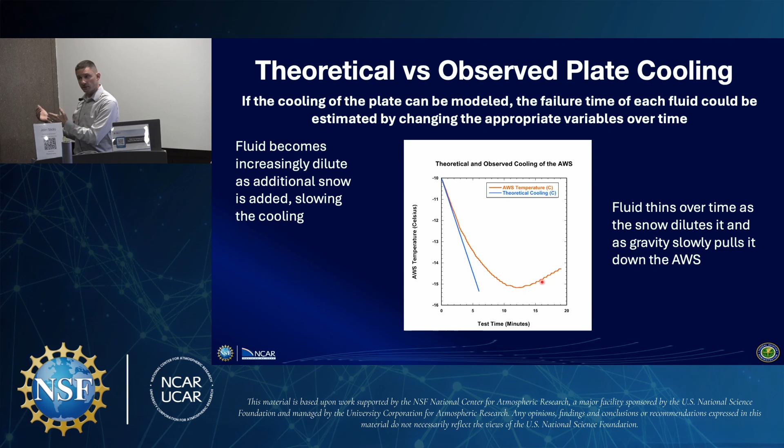So as I said, the fluid becomes increasingly dilute, which slows the cooling. The fluid thins over time because gravity is pulling it down the plate, but also because of the water being added to the fluid itself. And the heat will be transferred into the fluid from the ambient room air as well. So it's not pulling heat just from the plate - primarily, yes, that's where it's coming from, but the air temperature in the room is also impacting that.

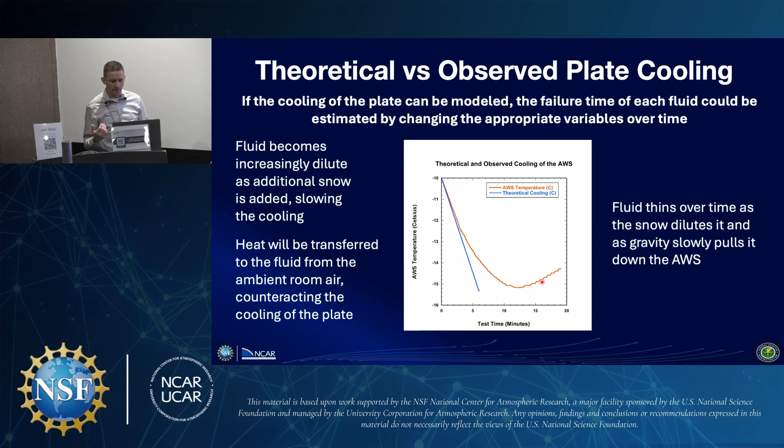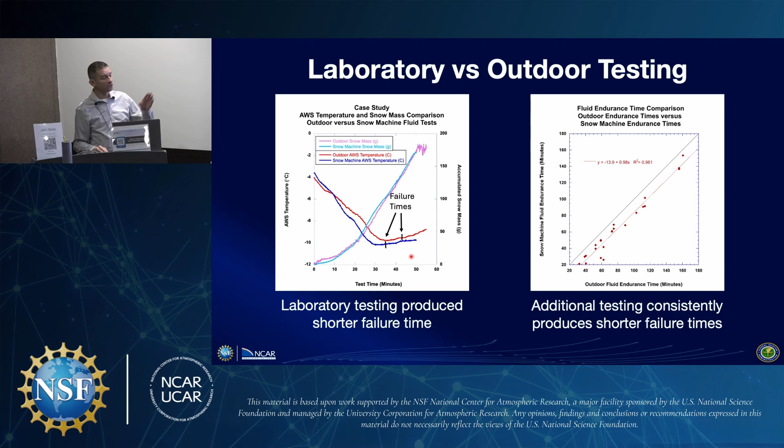The reason for that is wind. Outdoors you get wind blowing over the surface, and your ambient air temperature is warmer than the temperature of the fluid and the plate, so you're adding additional heating to the fluid, which makes it last longer. So if you want to do the most conservative testing for these fluids, doing it in a laboratory environment like we're doing, where you don't have wind, is actually the best way to go.

So where are we at now in terms of next steps?

There is an international community that meets, consisting of all the fluid manufacturers, all the airlines, all the regulators, meaning FAA, Transport Canada, EASA in Europe, and they get together twice a year. There's a big meeting held in May every year, and then a smaller meeting held in November, where updates are given on the status of new fluids coming out, tests being done on the fluids, and the snow machine is at the forefront of these discussions.

Everybody wants to see the snow machine become the international standard for testing these fluids, because you can do it anytime year-round. You can do it in a laboratory environment. You don't have to wait for the right conditions to occur outdoors. You can simulate them yourself, and you minimize a lot of the problems we see outdoors. You're going to minimize the scatter that we see in a lot of these different data points.

It'll also allow us to assess the impacts of the different snowflake sizes on some of the failure times, because there are questions we're getting where they say, yeah, this one test we did, the snowflake sizes were a lot bigger than this other test. We think that's potentially a problem.

They're also looking to explore the integration of other precipitation types. So now that we can do snow, can we put nozzles in there and also do snow and rain at the same time? And can we come up with holdover times for those types of situations?

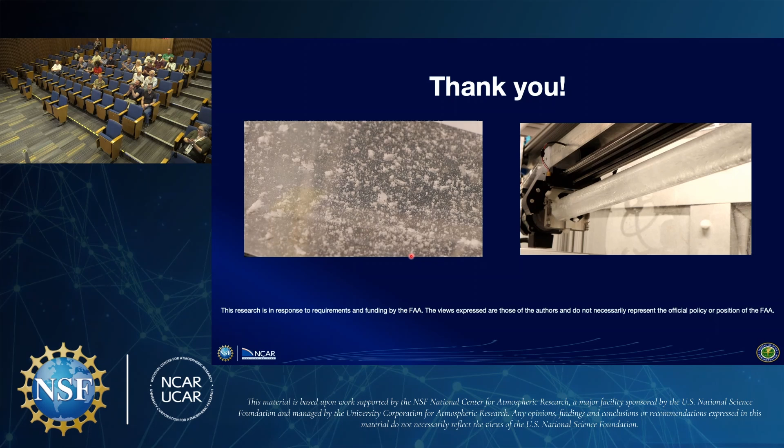As the airplane is accelerating down the runway with all this fluid sliding off the back, what happens when the next airplane tries to land? Excellent question, one we've received many times. The nice thing about this fluid is that not only does it protect the aircraft wings from precipitation, when it lands on the runway, it can continue to provide some of that protection on the runway as well. So for runway plowing operations, we have another group in our laboratory with a product being used at DIA, where they tell them different types of fluids they can use to de-ice the runways. This kind of gets grouped in as part of that. Usually over time, when you get enough snow buildup, it stops providing protection. It gets really slushy, and then runway plowing operations push it off to the side. So yeah, it doesn't really have an impact on landing aircraft. Great question, though.

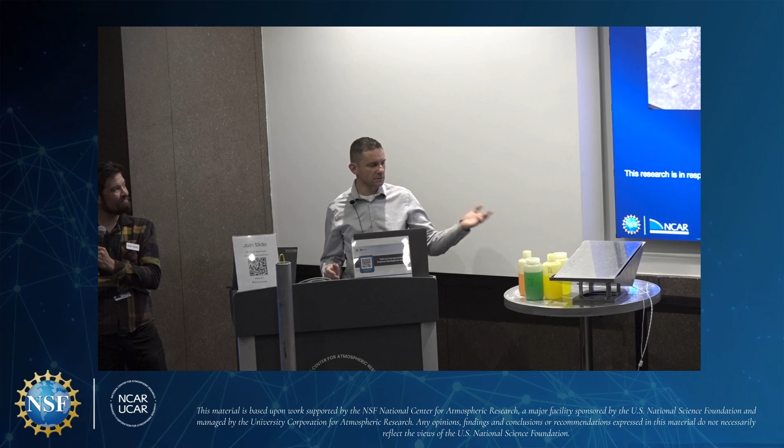So why is the test plate reflective? Why not use something painted similar to an airplane wing? Another excellent question. There are actually standards for the plate — this one, I can tell you right now, is not up to standard. There's a certain polishing level we have to do on the plate that will very closely match what you get from an aircraft that's been painted and then had a clear coating applied over that. For our purposes, silver is just easiest to use.

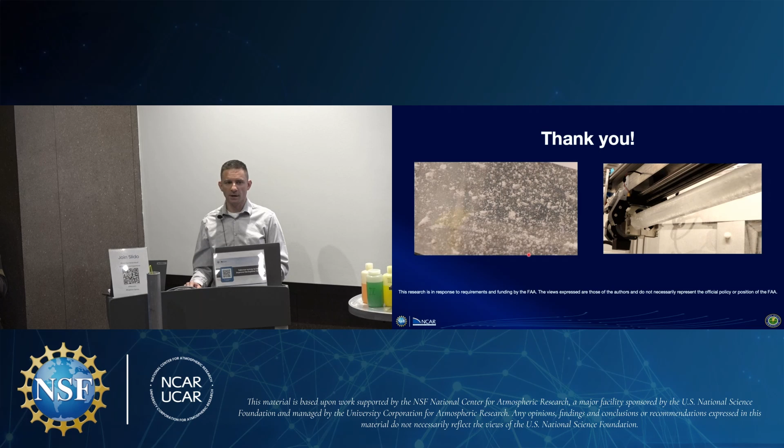The warmer temperatures naturally give us the bigger flakes, a little bit wetter, and they tend to more closely resemble the natural size distributions that we get outdoors. At the colder temperatures, we get much smaller flakes, but again it tends to naturally mimic some of the natural variability that we see in the size distributions outdoors. So it's almost a serendipitous side effect of the machine that it's naturally creating these size distributions that we would see in nature. Yeah, another great question.